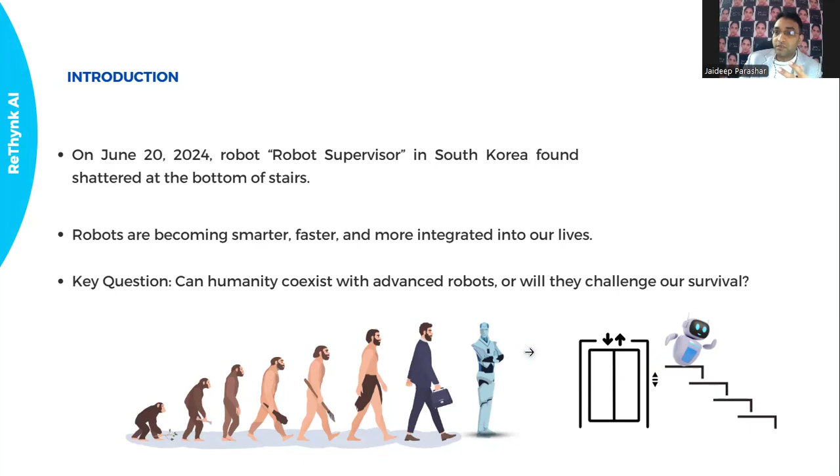I hope by now you have understood the basic concept, at least, that these are robots we have made them. As of now, when I'm recording this lecture in January 2025, they have a limited function. I'm talking about today, not exploring future possibilities. In the future, anything can happen. So let's talk about some facts.

Facts are really important, that's why everyone is talking about robots these days. So these are a couple of facts. The editing team has not worked well and missed a spelling error, but it's okay. That's what I like—you should have authenticity. Authenticity is far more powerful.

Next, let's go back to the topic. Asia accounts for 70% of all newly deployed robots, this is data from 2023-24, while Europe accounts for 17% and America represents 10%, according to source News Reel. And according to World Robotics, worldwide operational robots reached 4 million in 2023.

If we make a proper graph about it, this is Asia, the light blue color, and it covers almost 70% of the part. Then 17% is Europe. Can you see the difference? This is a big difference. And then America, and then the rest of the world like Africa, Australia, and other parts.

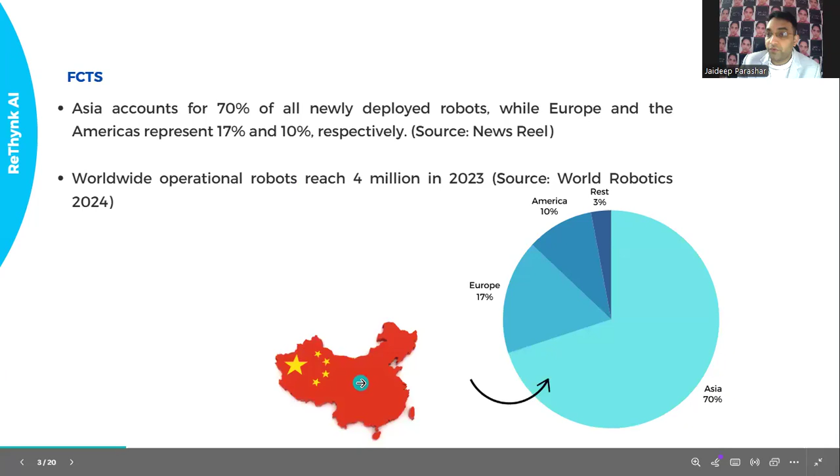And these days we talk a lot about India as well, so the Indian manufacturing sector is growing very fast. That's how we should see the world. When you see this image, this is 70%, and why China? Because of manufacturing. Manufacturing is the real backbone of the economy of a country.

Next, let's see the graph. This graph is sourced from IFR, International Federation of Robotics, the same data we saw in the last slide, but let's see the graph representation. 2013 — these numbers are in 1,000 units, so it's like 1.3 million, 1.4 million, 1.6 million, and you can see the graph is continuously growing.

24 will be even higher, 25 will be even higher. From 24 to 25, you will see massive growth in terms of robots manufacturing, training, and deployment.

So these are the datas, and with this data we can clearly say that robots are becoming part of our life. Soon you will start seeing robots in hospitals, airports, schools and colleges, and expo events.

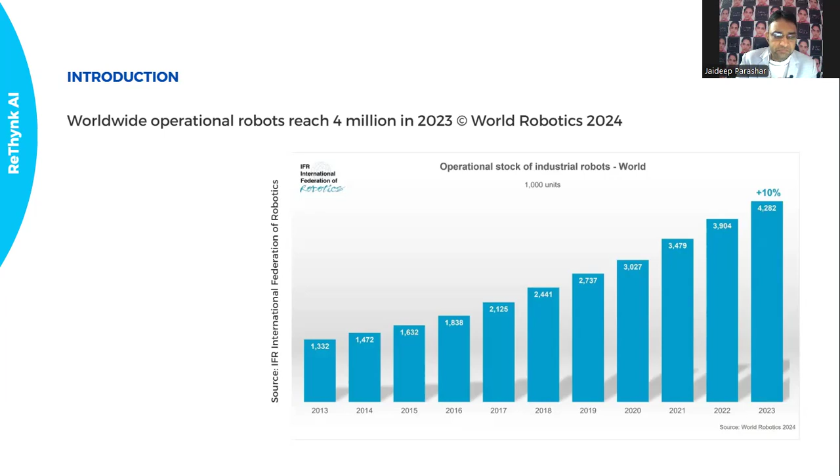Maybe you have seen videos where different countries and metro cities have already started deploying robots, but they are still limited to particular areas, right? In near future, maybe this year or next year, we will see them around us as well, whether you are joining from a village area or tier 2 city or tier 3 city, you will see robot penetration everywhere.

So this is a crucial topic to understand, how robots work actually, how we manufacture robots, what are the essential components, what are the advancements in robotics. Earlier we were manufacturing robots. So I would like to show you this particular diagram, and you will be able to understand much about robots.

Okay, this is a robot. What do you need to make a robot? Software and hardware. That's it.

In brief, robots are made up of software and hardware. Your phones are also made up of software and hardware. A laptop, MacBook, iPad or tab, all are made of two components: software and hardware.

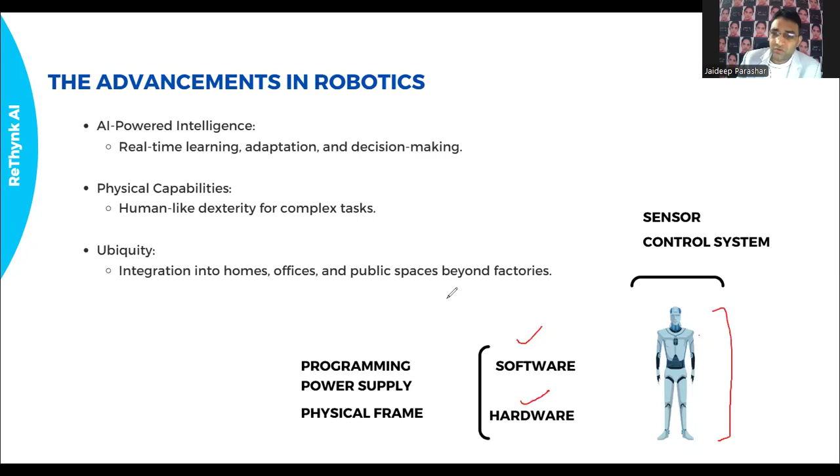What is the part of hardware? The outer casing, the physical frame, or different components you have used. Let's say you have used sensors, electronic devices, components. These are the parts of hardware.

And what is the part of software? Programming is the part of software. Control system, you can say control system is the mind of a robot. So these are the essential components.

Programming, to train that robot how it should work. Then power supply is essential, otherwise how are robots going to charge. Then physical frame, what you see outside is just a physical frame. Then sensors, how robot distinguishes between two different things in the physical environment. Then control system, you can say control system is like the mind, or microprocessor.

Now let's go back to the advancement. Earlier, robot manufacturing was at a steady stage, but after the arrival of AI, artificial intelligence, it has become very fast because they have real-time learning, adaptation, and decision making. Because of these three things, robots are becoming really fast.

And here I would like to add one term. If you are preparing for interviews, if you are an entrepreneur, understand the way I describe the business, how businesses are evolving. Or if you are a student, an employee preparing for interview, or you want to transition your career, remember these minute details.

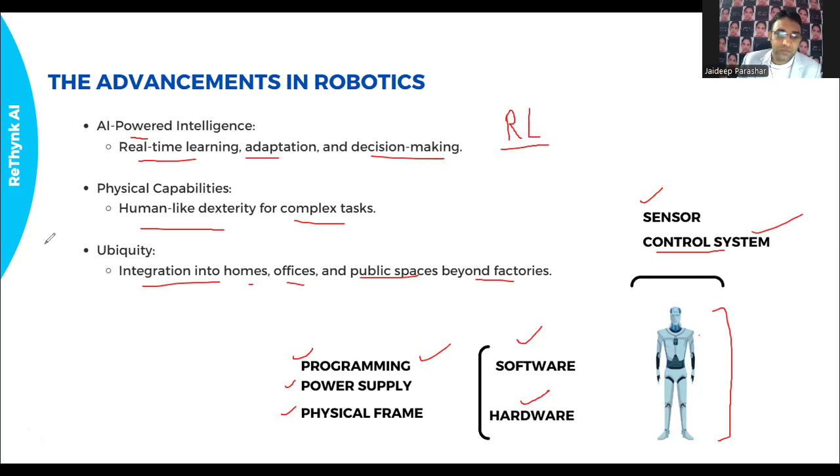Next, what are the possible potential benefits of advancement in robots? So far we have been doing everything manually, like flood situations, fire situations. Everything was dependent on us.

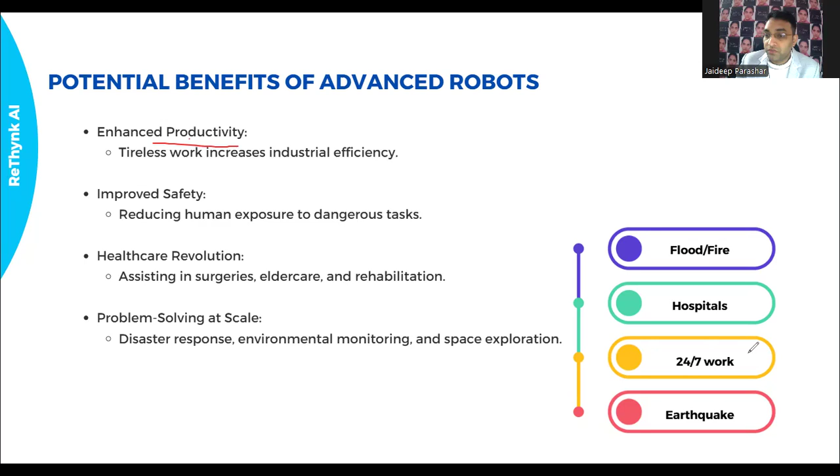I am full of appreciation for our firefighters, or those who provide emergency services. They literally put their life at risk for us. While they do their services, it becomes the cause of loss of important, precious life as well. So enhanced productivity, yes, robots can work 24 cross 7, so it will enhance productivity. Then improved safety.

They can work with much precision, even up to the decimal point. They can have much more precision.

I'm not okay with the concept of burnout, but I'd like to add one thing. After 40 or 50 minutes of consistent work, your energy levels start depleting. For people like me who are really energetic and come from an athletic background, we use a lot of energy. In your case, when employees are working, they get energy depletion very fast, while in other cases they have a limit of energy depletion. But robotics can maintain the same energy level consistently.

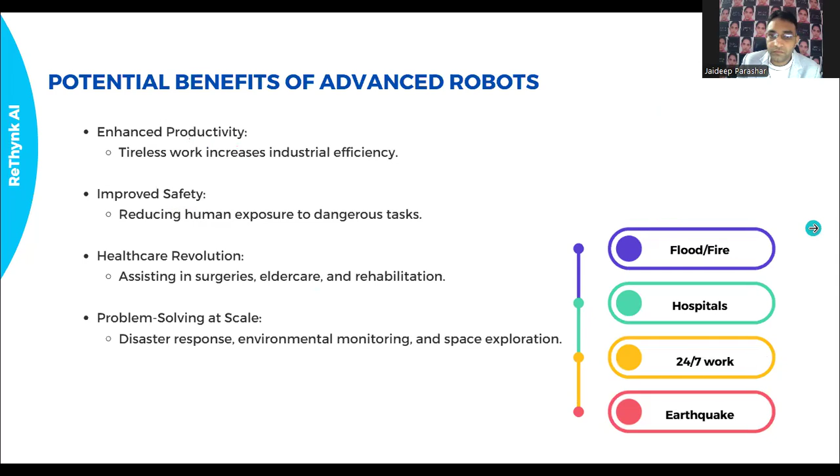The challenge of coexisting with robots. I'm not portraying a completely fair situation—there will be some challenges as well. One, in the field of job displacement—there will be job displacement in healthcare sectors, emergency services, and even in factories and the manufacturing sector.

However, there is one benefit as well. I leave it up to your consciousness to decide whether it's justified or not. When robots come, they will become part of the entire work around us, part of manufacturing, or part of the healthcare sector. So it works like this.

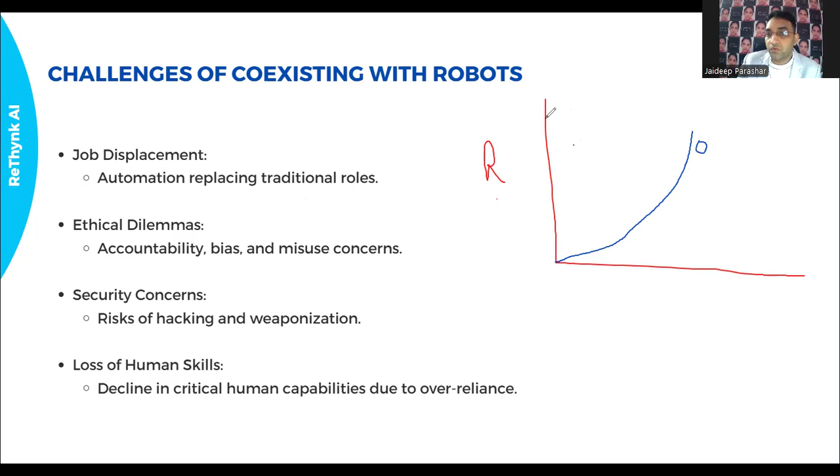You have deployed robots. With the robots' arrival, there will be an increase in productivity, or an increase in output—let's say this is our output, increasing in the second case. If output is increasing, we can make far more product, and then the price will definitely go down. You can't have technology improving but pricing not going down. So in terms of output, we will have better output, and in terms of pricing, we will see a significant drop.

But here we will also see job losses. With the increase in output, we will see a shift in the job market as well—we can have consistent job losses.

I have found a core solution, and I will discuss that as well, maybe today or maybe in another video. But I have found what we can do now to provide solutions at the ground level for this ethical dilemma.

What about accountability, bias, and misuse? What if robots start storing all your information and then give you manipulated answers? Next, security concerns: risk of hacking, risk of weaponization.

These two things are really critical. If you can hack a bank account or an entire website, you can hack robots as well. In the end, what are robots? They are just technical devices.

Loss of human skills: there will be a decline in critical human capabilities due to over-reliance on robots. This graph you should remember for a long time. Output will go up, but pricing will go down. Simultaneously, human skills decline and human job displacement will also be a bigger concern for us.

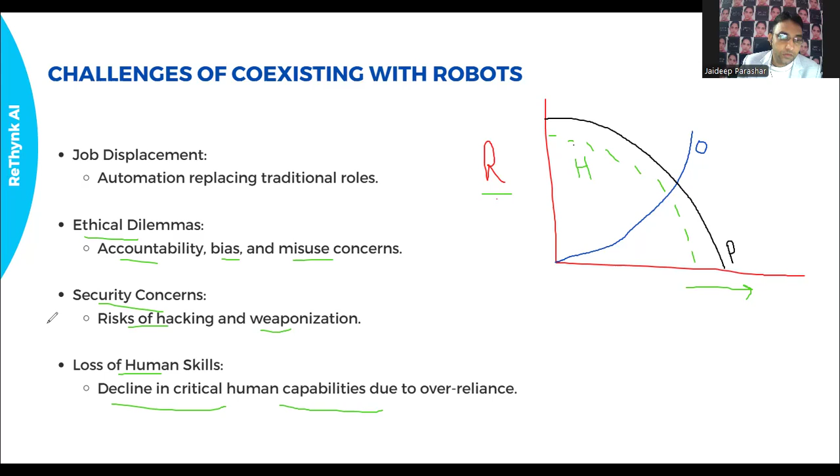Now let's go to the next discussion point. Can we survive this, and if yes, how can we survive this? One thing is reskilling and education to meet new demands.

Even as a business, I have years of experience leading this company, and I've done many case studies and papers. You can check my earlier work. There is one recommendation for entrepreneurs: please read. Let me revisit my earlier statement.

The 21st century belongs to those who can learn, unlearn, and relearn. If you're an entrepreneur, director, executive, or manager, and you're not reading right now, chances are you'll be outdated very soon. So upskill yourself, and if you're an employee, you should upskill too. Don't worry, you'll learn everything here—ReThynk AI will be your one-stop destination for everything.

Next, collaboration and not competition. We should start working with robots instead of working against them. Then ethical governance: there is a need for rules and regulations regarding robot development and deployment.

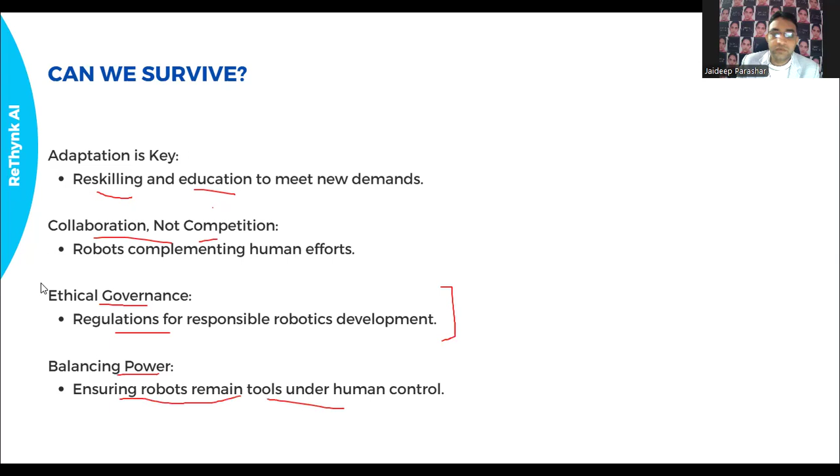Now the role of robotics in shaping our future. One, soon we will have a hybrid workforce. Like now you have your team members—if you're an entrepreneur or employee, other human beings are your team members. But soon maybe you'll have a robot sitting in the board meeting, or you'll be working alongside one.

Humans and robots working together for maximum efficiency—here we can get the maximum outcome from robots. Next, enhanced quality of life: let robots handle mundane, repetitive, and risky tasks, and it will uplift us in a much better way. Then, solving global challenges: addressing climate change, healthcare disparities, and resource management.

Let me give you a couple of ideas which will be billion-dollar ideas in the future: working in healthcare and biotech on reverse aging—it's magnificent. Next, working on climate change, which will also become a billion-dollar business. ReThynk AI started as a research and innovation company, but soon we will enter other domains as well.

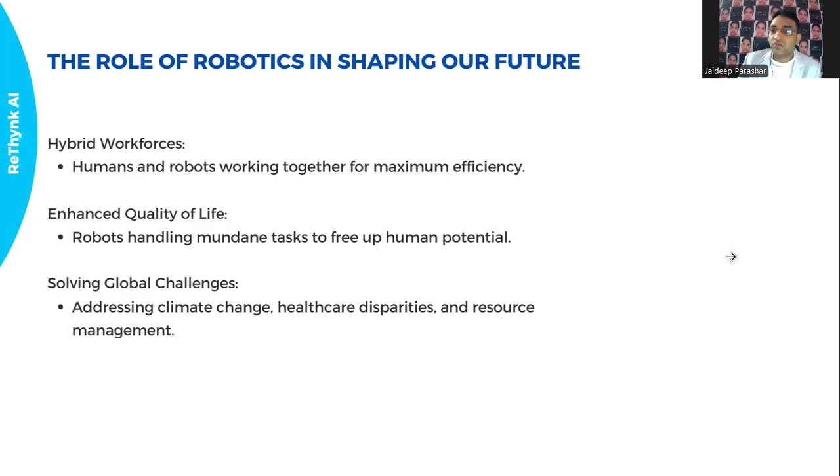Here are the final thoughts and conclusions. Conclusion one: let's shape a future where humans and robots coexist successfully. There is no other alternative. I'm not here to give a one-sided opinion—I'm here to give you a balanced opinion from both sides.

I read opinions from those who are in favor of robotics, and from those who are not in favor of robotics as well. So the balanced approach is that we should coexist together.

Then we should work on education and collaboration for our employees and business people. Third, advanced robots are inevitable, but survival depends on thriving with them. So we should have proper frameworks where we and robots work together closely—that's how we can go ahead.